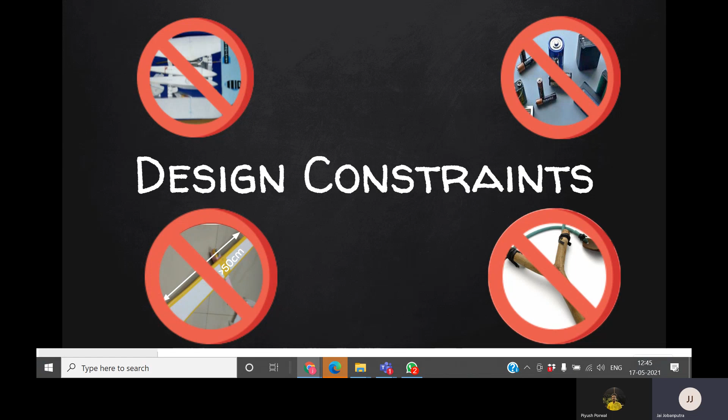Also, make sure you do not use any electrical components because we will have some issues in judging you. Even electrically controlled ailerons are not allowed. It should be a purely mechanical system. Not even chemical stuff, I mean, fuel-based stuff is also not allowed. So make sure you note those things.

So here's the glider launching mechanism. I'll not go into much depth; I'll just give you an example and cover it using that. While making the glider launching mechanism, make sure you have control of angle and speed, up to some point obviously, so at least you have some estimate of angle and speed. That would help you a lot because you need to control those two things for modeling the endurance. This will be covered in the next webinar, which is on the 19th, but make sure you have these things in mind.

So let me start with the last slide which was covered in webinar 1. Let me explain it again. Basically Cm is the coefficient of moment, but don't confuse yourself with the notation. Just think of it as a representation of moment, because the rest of the stuff is constant in our discussion. So make sure you understand this.

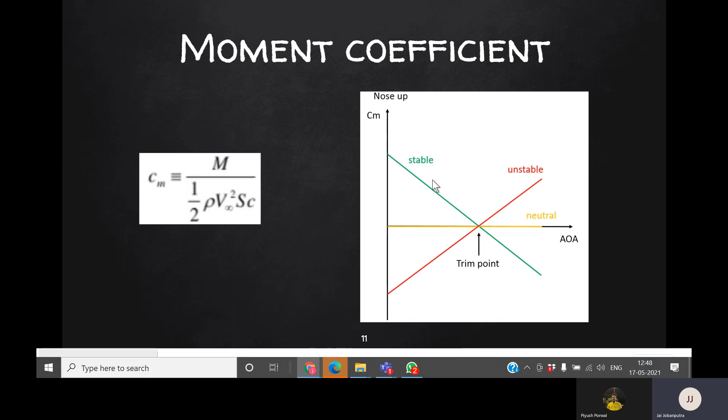I'll show a few more things in the next slide, but this is basically a plot between moment and angle of attack. Why it is stable, unstable, and neutral, let us discuss. The first thing is what is actually positive moment. This is called pitch up, where the nose goes up and tail goes down. Any moment that causes a pitch up, or toward inside the plane for this case, will be positive moment.

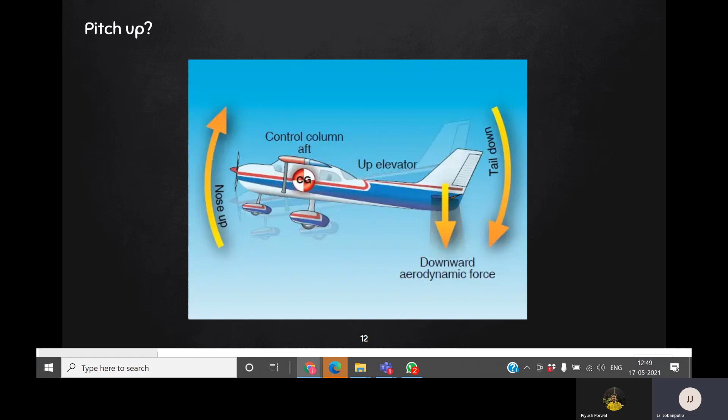The second thing you should keep in mind is stability: what is stable, unstable, and neutrally stable. When we talk about stable, we mean if we nudge it a bit, it will tend to go back to its initial position. Neutrally stable is when if we nudge it, the position does not exactly change. And negative static stability is when nudged, it will go to a different position. So keep this in mind.

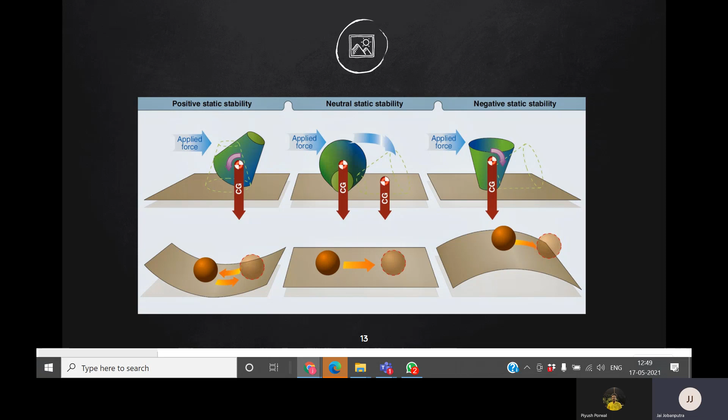Now let's discuss this graph. This is very important because it will come in handy in later concepts also, so pay attention. Suppose you are cruising at the equilibrium point, which is the trim point. Suppose there is some turbulence and your plane suddenly pitches up a bit. Now you want to make sure you provide a moment such that it pitches down and goes back to its trim point, because that's what stability is all about.

Let us see what happens with a positively sloped moment-angle of attack curve. Once it pitches up a bit, the moment provided is positive. But if we provide a positive moment while it's pitching up, it will tend to pitch up more. That means it will go to a different state, not a stable state. This is not what we want, so this is actually unstable. You can check the other side also, negative and negative.

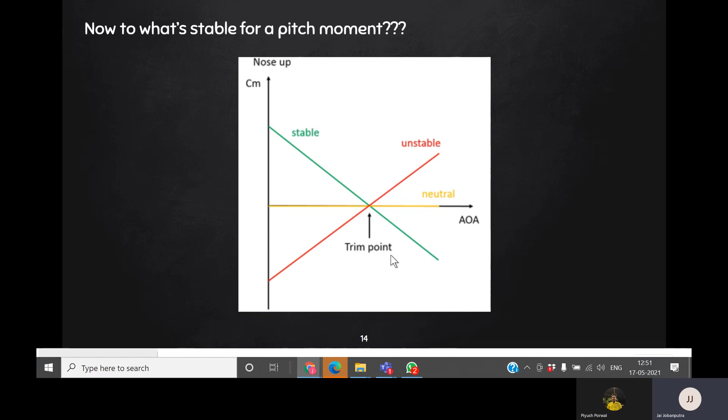Now let us look at the stable curve. If it pitches up a bit, we provide a negative moment. Negative moment will decrease the angle of attack, as pitch up is an increase in angle of attack. So this is a stable plane. That's the reason this is stable, and make sure your glider follows this curve. How would you make sure of that? Let's discuss in the upcoming slides.

One concept you should know before going into the detailed maths is the aerodynamic center. The aerodynamic center is more theoretical. The proof of existence can be easily done; you can search it online. Basically there is a positive moment at one edge and a negative moment at the other edge, and by IVT you can prove that there would be no change. It is very easily done on various websites.

You can have a look at it. So this is actually a point where moment does not get affected by angle of attack. So it is helpful in the calculations, because then we can say it is independent of angle of attack, so we can calculate stuff here. It's usually at c/4 of the wing. C/4 is chord by 4.

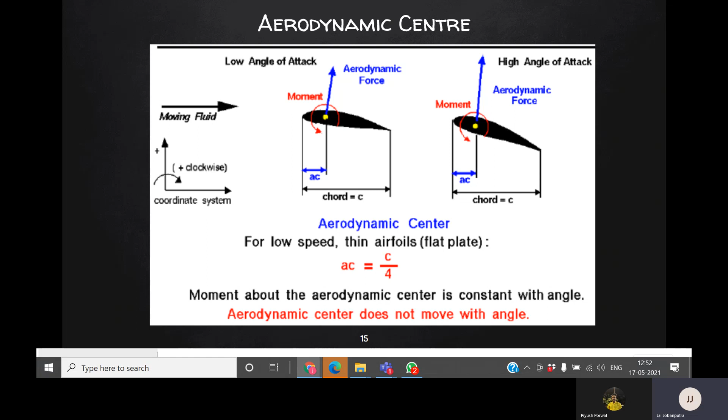So if anyone has experience of RC planes, you will notice that a lot of times you would be told by your instructor or anyone who is guiding you that the CG should be at c/4. Now its significance will be clear to you in the upcoming slides.

Now lift is positively linearly dependent on the angle of attack. So as angle of attack increases, lift increases. So if you look at it in that sense, you'll see that moment and angle of attack will have a negative slope. So that makes sense, right? That's exactly what we wanted. We wanted a stable glider, and negatively sloped, as we already discussed, is a stable glider.

But there's something off here, and that is what will happen at the trim point, at the equilibrium point. At the equilibrium point, moment about CG will be 0, and we see that lift will be negative because MAC is always negative. For cambered aircraft it is negative, and for symmetric it is 0, and that also we don't want. We don't want a 0 or negative lift for our glider, right? It won't fly. Okay, so that's an issue.

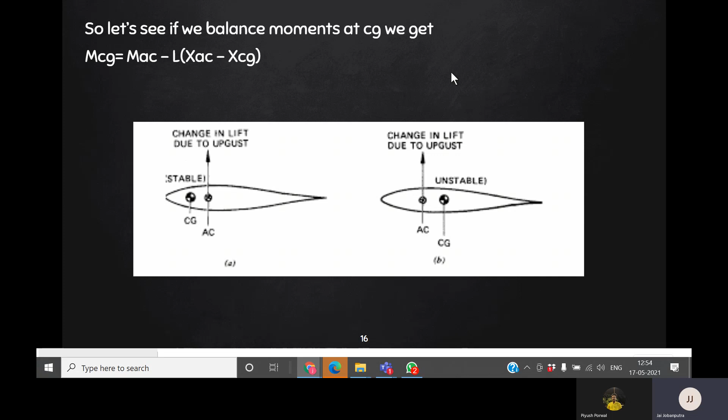Now, how exactly it came, you can check the maths. It's pretty trivial, but it's pretty long, so I am not covering it here. So you can check the math. It's available anywhere. If you want, I can send you the links. You can contact me for that.

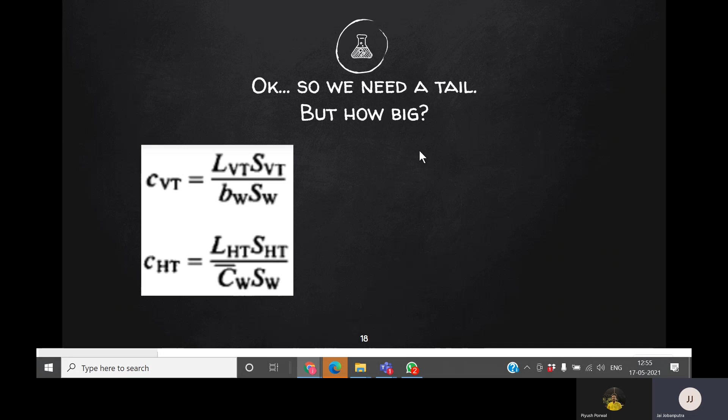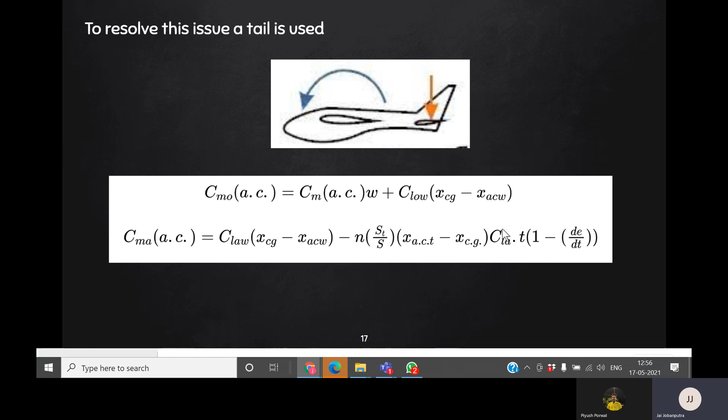Now, when you have these two constants, as you can see from these equations, by comparing these equations and putting in some values which are commonly used in our RC planes, you will see that you will have a range of values for these two guys. These two guys are basically called tail volume ratios. For these tail volume ratios you'll have a range of values, which you can easily find online, and from that you can actually design your plane.

From that range you can select a value, take that value and put it into the equation, and you will find the area of the tail, and you can decide the aspect ratio and all those things, and you can easily design the tail. We'll cover more on that in the next lecture, but that's why these ratios are important. So what exactly are these ratios? Intuitively, these are basically the non-dimensionalized form of the torque on the tail. If you look at it a bit more closely, it's more of a dimensionless torque.

Okay, with that done, let us cover the rest of the stability part. With stability, you can understand the concept of neutral point. Now, what exactly is the neutral point? As I already discussed in the wing only configuration, if you have AC and CG at the same point, where the mark denotes CG, so if you have XAC and XCG at the same point, you will have a zero slope. With slope being zero, it's a neutral point. Neutral because if you perturb it, there's no change in moment, so there will be no response to the perturbation.

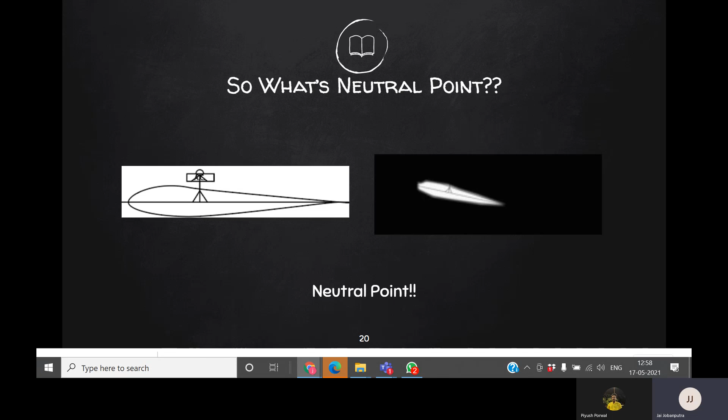We generally don't desire it, but it is more of a limit point. And for a wing only configuration, the neutral point is AC, right? So make sure you understood that. But when you add a tail, the neutral point shifts a bit behind, towards the tail. So when you place CG at AC, you are basically ahead of the neutral point, and you are in the safe region where it is stable. And the distance between the CG and the neutral point is called the static margin.

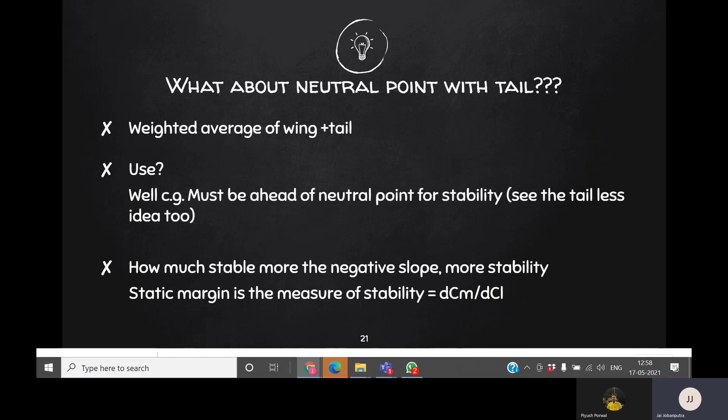With a bit of maths, you can show that static margin is proportional to the slope of the CM-CL curve. CM-CL directly relates to CM versus angle of attack. So, the more the static margin, the more the negative slope. That's exactly what you want, right? The more negative the slope, the more stable your plane is. So make sure your static margin is good enough. But a question will arise: to increase the static margin, I'll just place CG as close to the nose as possible. Then we have the most stable plane, right?

Well, that's not exactly true, because as we discussed in the last point, a stable plane can have negative lift. And what that means is the plane will simply drop. It is pretty stable, but it is just going down. So you don't want that, right? You want a stable plane, but also a plane which can glide a distance, which has some lift attached to it. By the way, this type of configuration is called a nose heavy plane. So make sure you do not build a nose heavy glider.

Now, what if CG is behind the neutral point? What will that do? Well, it makes a very unstable glider, as you can see in the GIF. Make sure you do not reach this configuration either; this is called a tail heavy plane. So make sure your CG is in the right position, so that it has a good amount of stability, and it does not have nose heaviness either.

With that I end this webinar, and the important takeaways are these. You should note these things down, because they will come in handy in the next webinar.